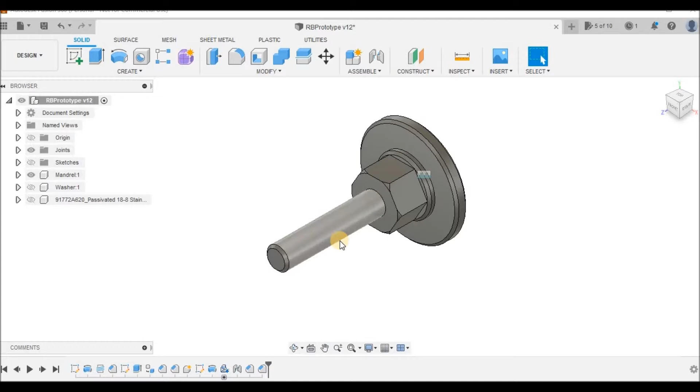So we can take our model and flip it all over around and look at it. But what we need to do is come over here to where it says design, and we're going to move down and select manufacture. So there we have it, we're in the CAM workspace now. They call it manufacture now.

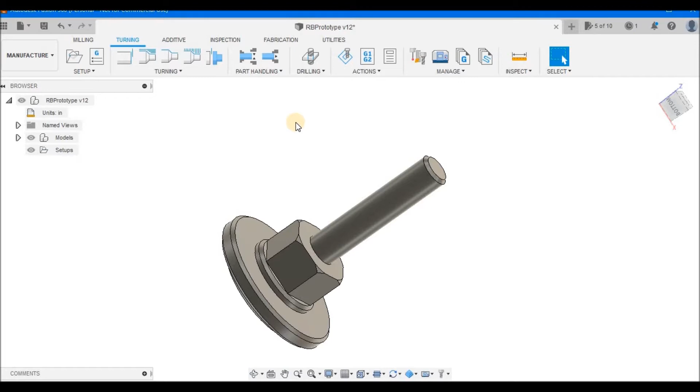So let's get our model squared up. The first thing we need to do is come in and make a new setup. Come up here, choose new setup. So we need to come over here and make sure this is on mill turn.

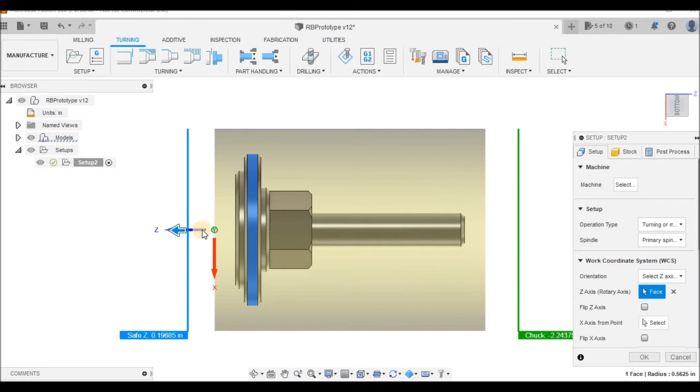And we need to select our Z-axis, which it appears it's already selected the Z-axis for us. It's going to choose a face. And you'll see over here that the Z is going in this direction. That's exactly where we want it. Looks like our X is where we need it to be.

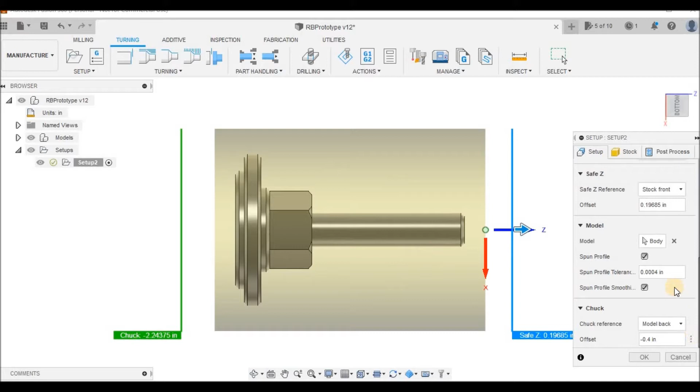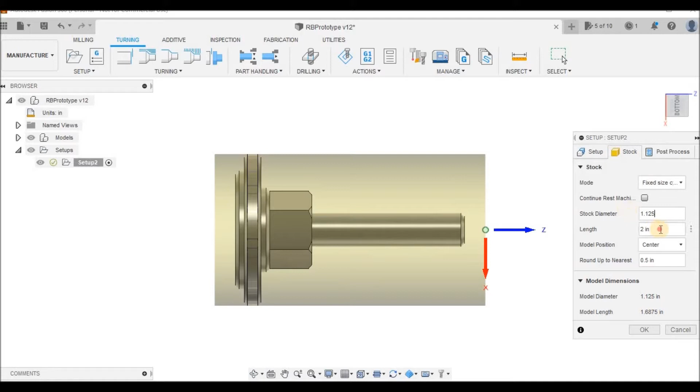Everything looks good there. Now we need to set our stock. Fixed size cylinder, our stock diameter is going to be 1 1/8, 1.125. Our length, we're just going to arbitrarily choose 2 inches so we have plenty of material to work with. And I want to change it from offset from front.

The last thing, we'll click on the post-process tab and we're going to give it a name. I'm just going to call this RB1, just something that I can remember. And then click OK. So now we have our stock defined, our setup's ready to go.

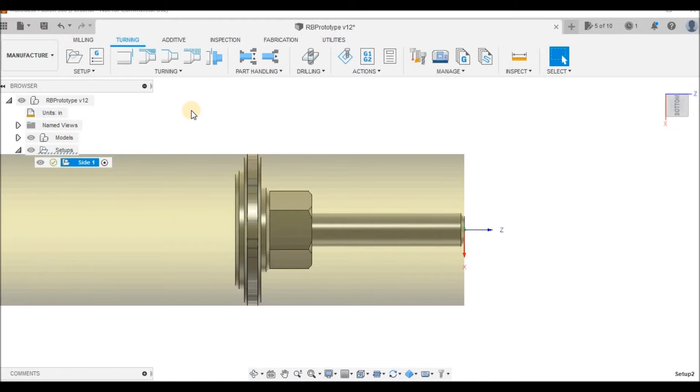We can come over here and click on setup, this is just a name. I'm going to rename this side 1. Now that we have that, now we can start our actual real cam work.

We're going to come up here off the toolbar and click turning face. And this computer is terribly slow. So we come in here, select a tool. I'm going to be using the WNMG 332 tool.

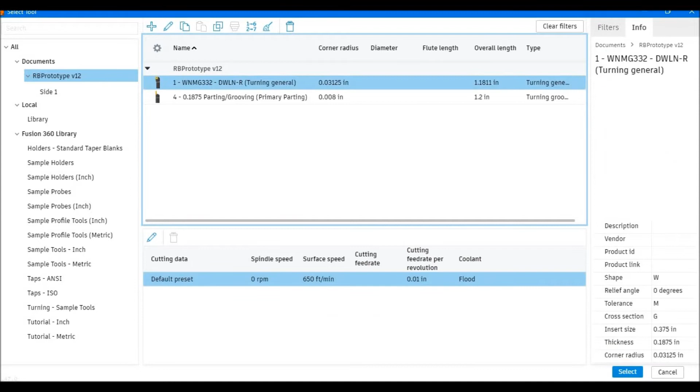Now we want to go through, look at all of our different settings. Definitely don't want a max speed of 5,000 RPM, let's change that to 950. We're going to use a cutting feed rate of 10 thousandths per revolution.

Next, we're going to look at our geometry. I need to rotate this model a little bit so the X is in the right place. So we don't need an offset, we're good to go there. Our diameters, we can drag this in just a little bit, we don't need all that extra clearance.

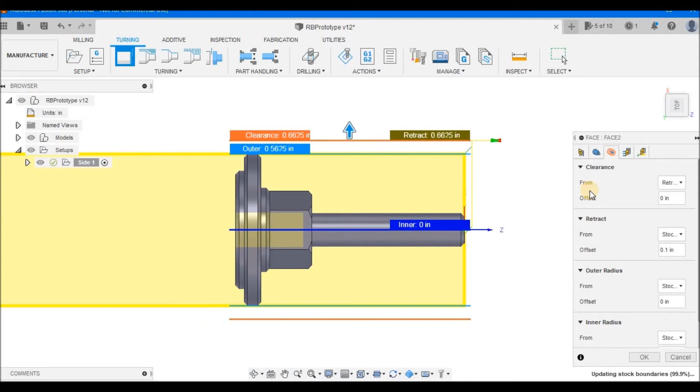Nothing really to do here. Everything looks good here, so we're going to go ahead and click OK. And our tool path is complete, we know that by we have a green check mark here.

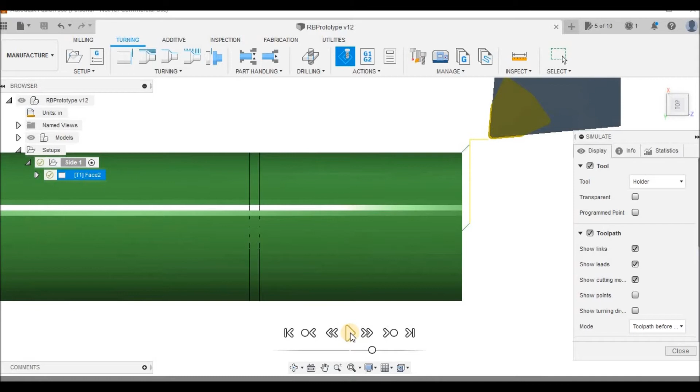I like to save often. And just for fun, let's go ahead and simulate that so you can see what we just did. I'm just going to come down here and hit the play button. You see our tool moves in, does a facing cut, and moves out. It's exactly what we want.

So the next thing we need to do is our roughing passes. We're going to come up here, click on our tool for turning profile roughing. It's already selected the WNMG 332 tool, that's exactly what I want. Tool orientation is correct.

Definitely need to slow that down to 950. I do want to keep this 10 thousandths cut at feed rate. We're going to select where our area that we want this tool to be able to work. This looks good.

Same as before, we can adjust our radius, so we don't really need to waste any time. I want to come down to this grooving and turn off grooving. We come down here and adjust our depth of cut.

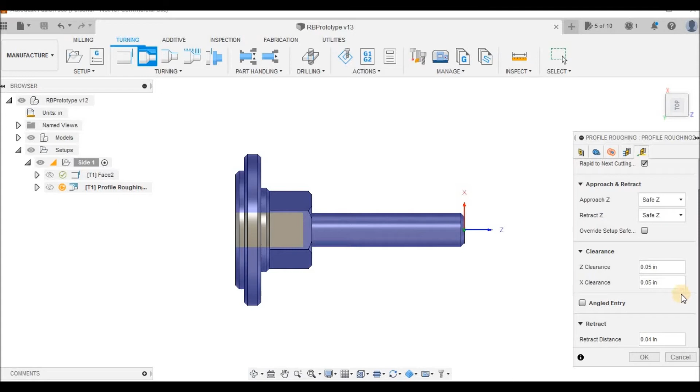Just going to do a quick once over of this last tab here, and I don't see anything out of place. We'll hit OK, and it's going to come over here and calculate our tool path for us. And like I said, this computer is terribly slow.

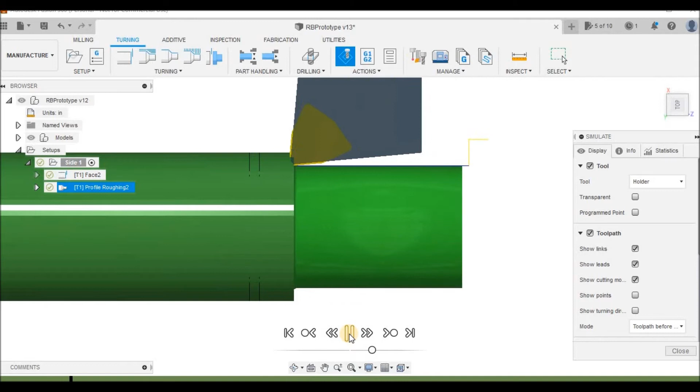That should have gone by faster. Just like before, let's simulate that, give you guys an idea of what's going to happen. Hit our play button. You can see that it's simulating exactly what's going to happen on the machine.

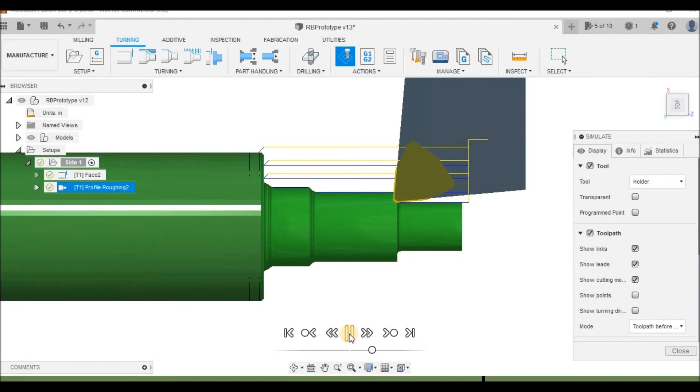I'm running this simulation pretty slow to make it easier for you to see, and that looks good to me. So that did our roughing passes. Now we need to do a finishing pass.

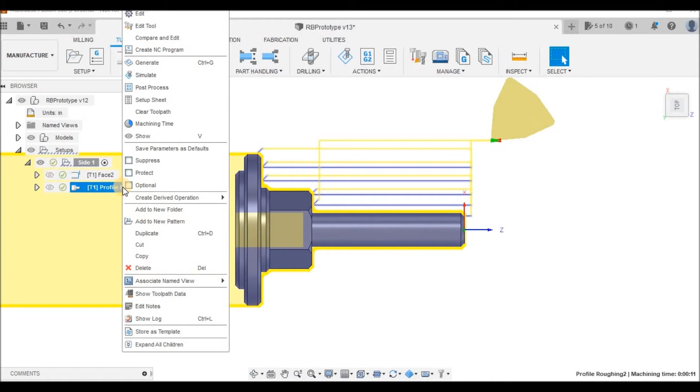So I'm going to come over here, right click on the roughing and create a derived operation, turning profile finishing. It's already selected our tool again for us.

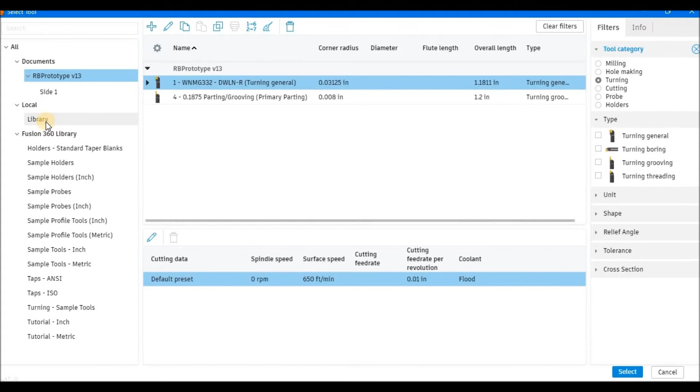Now we would have an option. In fact, let's just go ahead and do that. Let's go ahead and select the tool here. We'll come to our tool library, and I want to choose tool number 3, the VCMT 332. Now we've selected that tool.

I think I want to maybe slow this surface speed down just a bit. Take that down to 600. We're on feed per revolution, and 5 thousandths feed per revolution. That's exactly what I want. And...

Everything looks good here. In fact, it copied the tool path from the last operation, from that roughing operation. It should have copied this radius too. Passes, we're only going to have one pass. Down here, stock to leave, we are not going to leave any stock, so we want this unchecked.

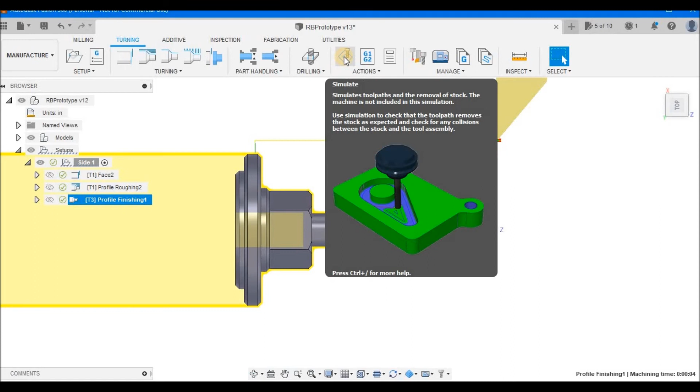In this last tab, everything looks good. We're going to hit OK. Our tool path is made, and let's simulate it again. Come down here, hit the play button. There you have a finishing pass. I'm going to go ahead and save that.

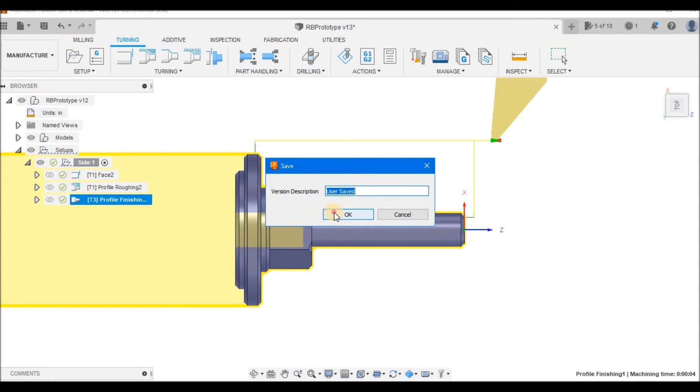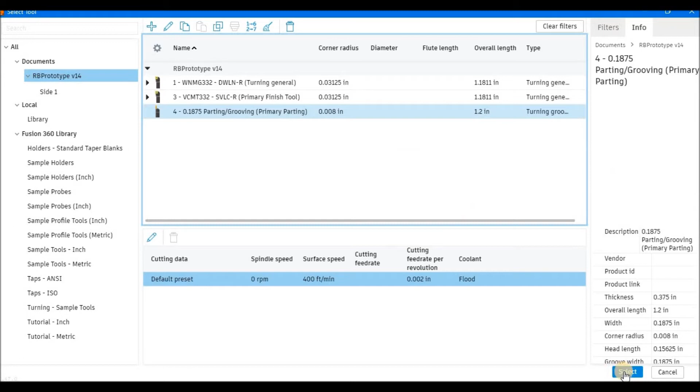The last thing we need to do is turning and grooving. We're going to come in here, select a tool, we're going to choose our parting grooving tool. It is 3/16, or 187.5 thousandths wide. We'll go ahead and select that one. Select.

Outside grooving is correct. Let me change this 5,000. I don't want this going over 900. I don't know about other guys, but when I run grooving parting tools, I try to play it pretty conservative and run a 2 thousandths per revolution feed rate.

Now we need to come in here and adjust our cutting area. We're going to start with that. Offset from front, let's adjust that a little bit. I'm going to change that to 1 9/16.

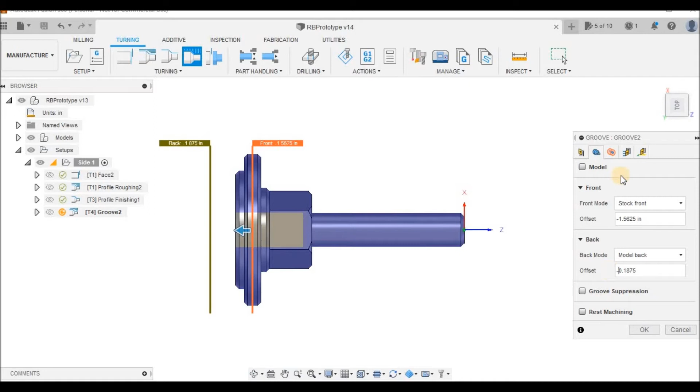And then our offset from the back, let's offset that 3/16 of an inch. Make that minus 3/16 of an inch. Just like before, we're going to bring our radius down.

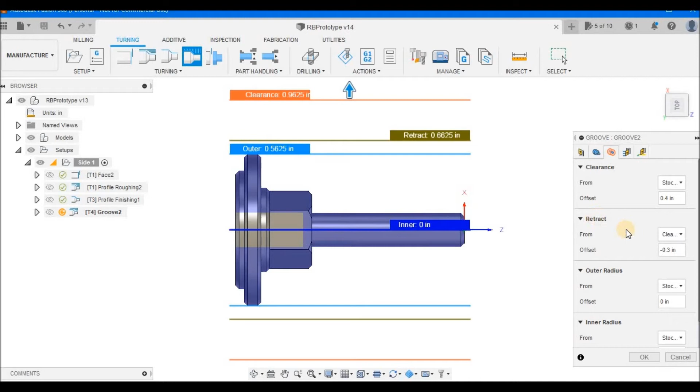And of course, it's not going to agree with me, so I can look like a fool. Our retract - I don't know why that's on negative. Let's set that to... just an extra decimal point in there. Maybe that's a problem. Not sure why it's giving me an issue with that offset.

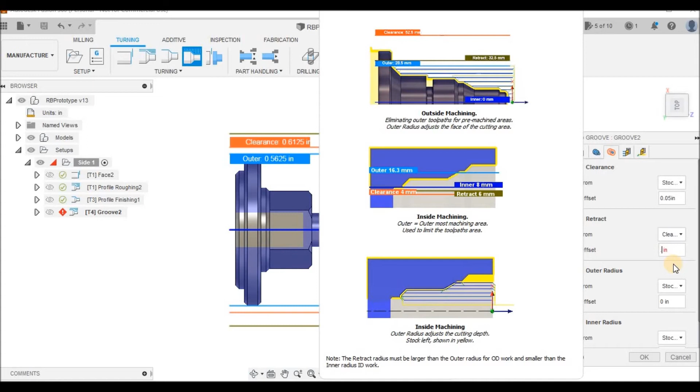There we go. All that looks good. We need to look at our passes real close. I want to change our up and down direction to only down. We can adjust our step over. We'll say 150 thousandths.

Finish feed rate, rough passes. Maximum grooving - let's make that 150 thousandths. And I'm just about going to bet this isn't going to work, and we're going to have to come back and figure out what's wrong with it, which that's okay too. It's all part of the learning. Let's hit OK and see what it comes up with for us.

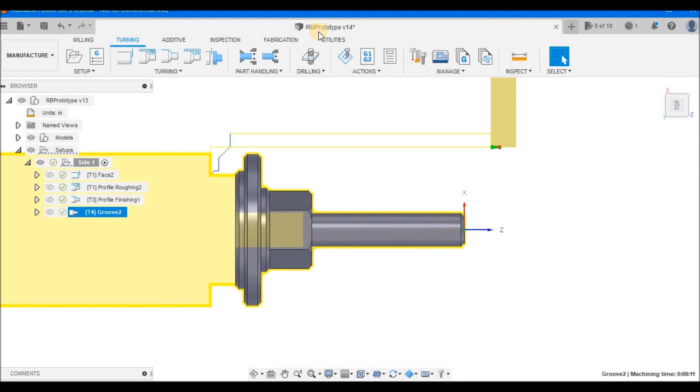So I can tell you right away, I don't like what this looks like. I'm going to simulate it, and you can see what I don't like about it. Pay attention right in this area where our mouse cursor is. You notice the tool turned red - that's telling me there's a collision. So we don't want that.

So we need to go back in and edit to see what we can change and make that better. We're going to go back into our passes. Let's try changing this and see what happens for us. It looks exactly the same, so that's not what I want. Back in and edit.

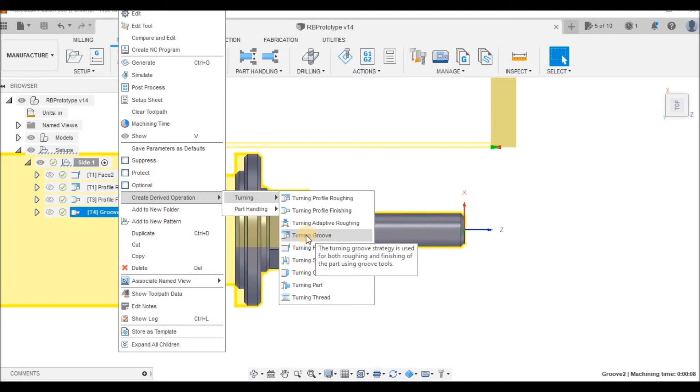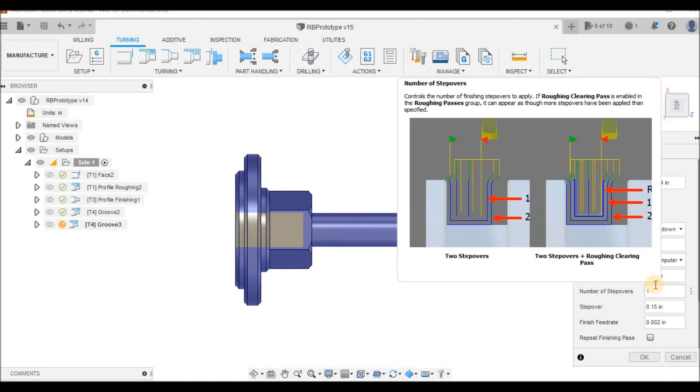Now let's create another derived operation, turning groove. Everything's going to be the same again. Go into our passes, let's turn off our roughing pass this time. Give it a go.

That looks good, let's simulate it. That looks good. So by doing it this way, we created a little bit of working room in here for the tool to come in and do this backside profile. The reason why I want to go ahead and do this profile now, instead of after we flip it over and run the other side, is so that our area here for our disc stays concentric to our shank that goes up inside of the die grinder tool.

So that pretty much gets us there, but we need to be able to cut it off. Let's see if by adjusting some things we can modify that tool path. See if it'll cut it off. It looks like it is going to. So let's simulate that. Coming across, does our profile, and cuts it off. That's exactly what we need.

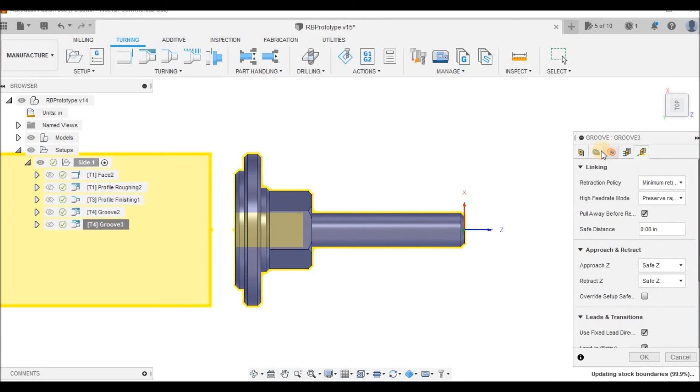Oh, it's on radii. Here we go. Distance to cut below center, let's make that 0.025. And OK. Now you'll see we don't have that little nub anymore. Let's simulate it, hit the play.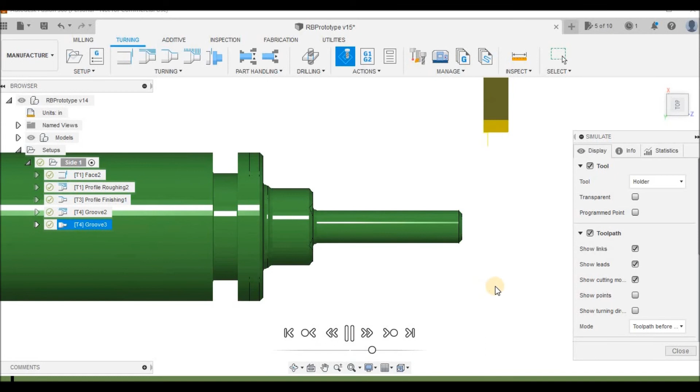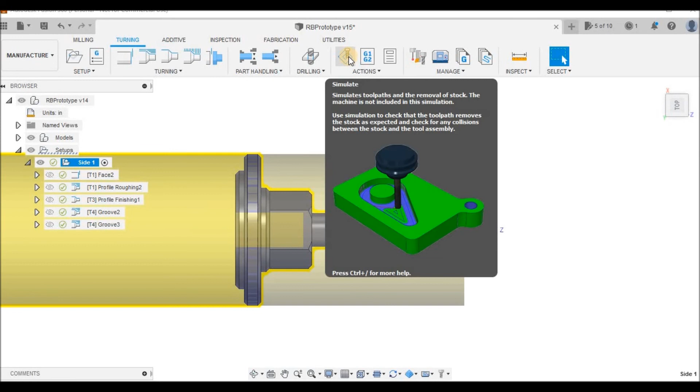That gives us our rough shape. And just for fun, let's come up here, select side 1, simulate the whole entire part instead of just one operation at a time. Speed it up just a tad. It's also going to put each operation into a different color.

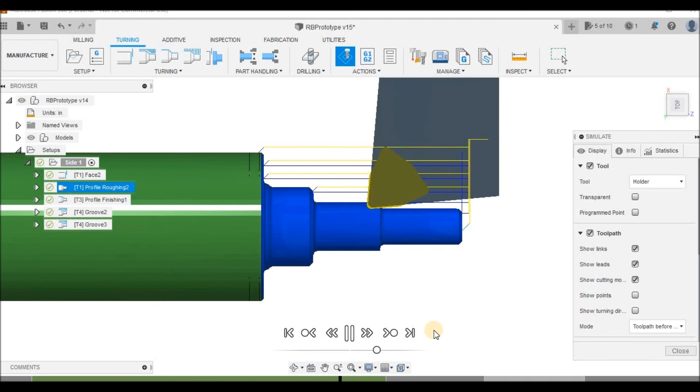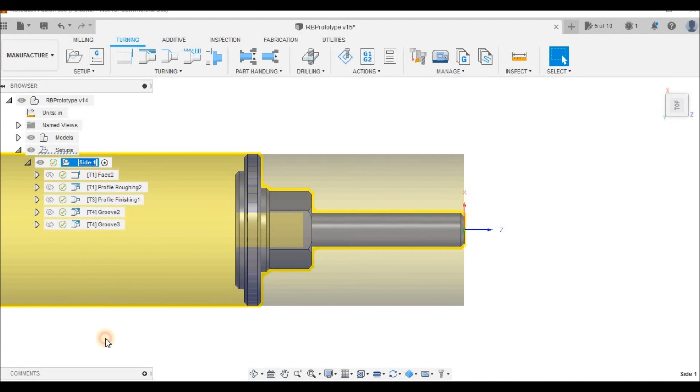There you have it. I'm going to go ahead and close. So it's saying 1 second down here in the corner for the facing operation, 11 seconds for the roughing, 4 seconds for the finishing, 8 seconds for the rough groove, and 12 seconds for the finish groove. I'm going to take a wild guess and just tell you that that's way too fast. It's going to run a lot slower than that when we go to try to really run the part. But that gets us through side 1.

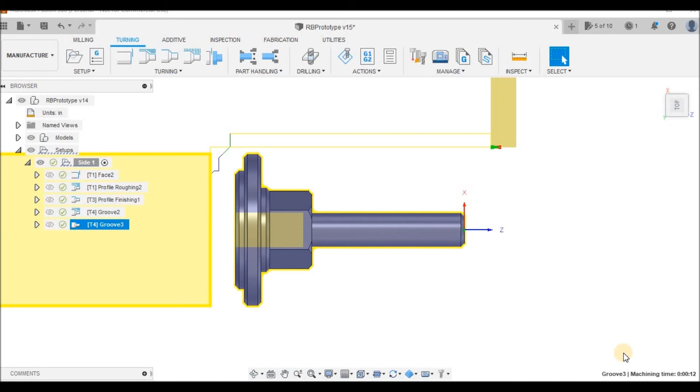We'll get this put together. Let's save this. And now we need to post-process. This will actually write the real G code that the machine will use.

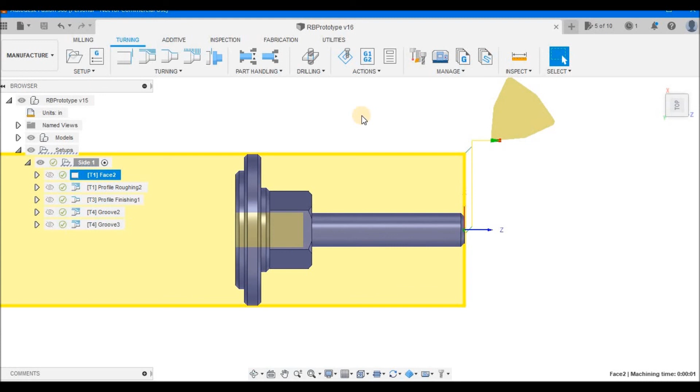I need to choose the correct machine. We have Okuma turning. And we need to change our output folder. So let's go ahead and make a new folder.

Let's do it this way. Come into our cam, create a new folder. Just call this the RB Mandrel. I'm going to select the folder, go ahead and call this RB1. I'm just kind of going over these options, these are kind of machine specific options over here. Looks good, and we'll just go ahead and hit enter.

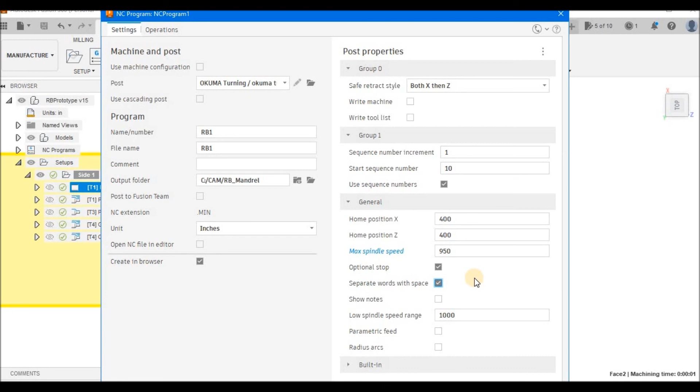And our OK button is off the screen. That's quite embarrassing. There we go, it took it.

Now, in the free version of Fusion 360, unfortunately, we have to post out each one of these and then manually re-edit them all. And I don't want to put you through that agony. So I think we're going to cut the video here.